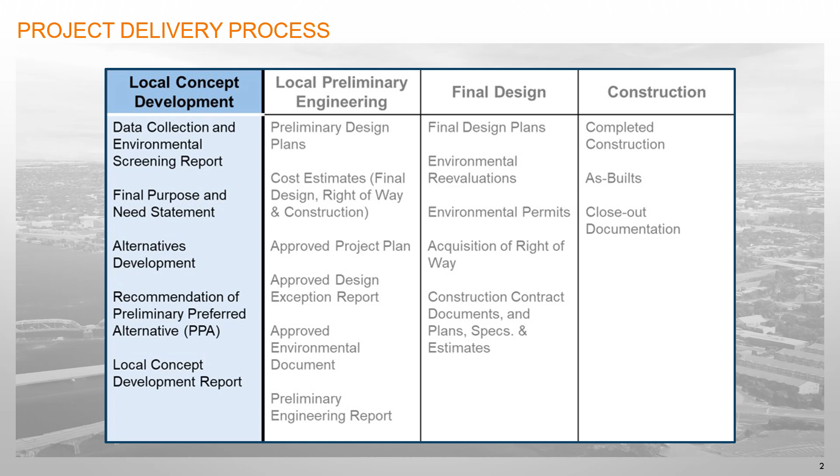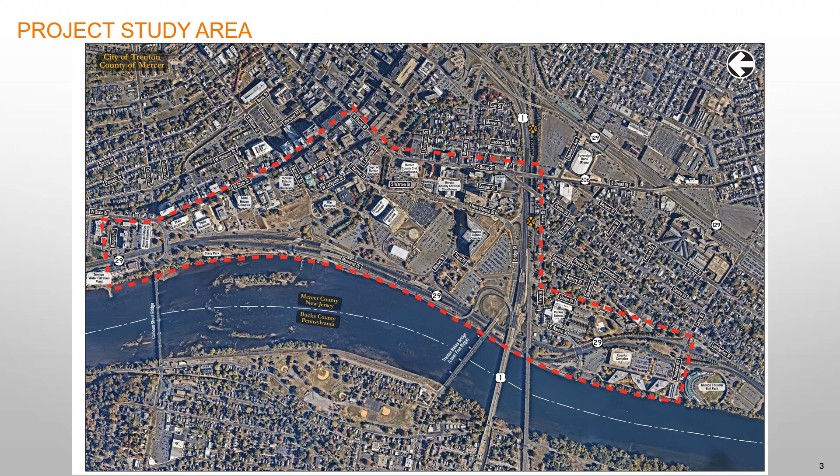The project is located in the City of Trenton, Mercer County, New Jersey, and extends along Route 29 from Cass Street to Calhoun Street and includes the downtown area bounded by Route 1 to the south, New Warren Street to the east, Calhoun Street to the north, and the Delaware River to the west. Note that the study area for the project is smaller than the area of economic revitalization impact, which we hope to be citywide. New mixed-use development and a walkable, bikeable, human-scale roadway can dramatically change the character of a city.

This project has a number of interdependent goals. First, we want to stimulate economic development in the immediate project area and citywide by changing parking lots into developable parcels and attracting developers to build multi-use facilities that include housing, retail, and business. We want to improve traffic connections to the downtown street network by converting Route 29 from a freeway to an urban boulevard and building a street grid connected to the existing street grid to the east.

We want to provide increased open space also by converting Route 29 to a smaller footprint roadway, and with the space we gain, create a riverfront park with passive and active recreation that connects the county's Old Wharf Park and South Riverwalk Park to the city's Stacy Park north of Calhoun Street. We want to increase the resiliency of the roadway so it can stay open during flood events while retaining the floodways of the Delaware River and Assunpink Creek.

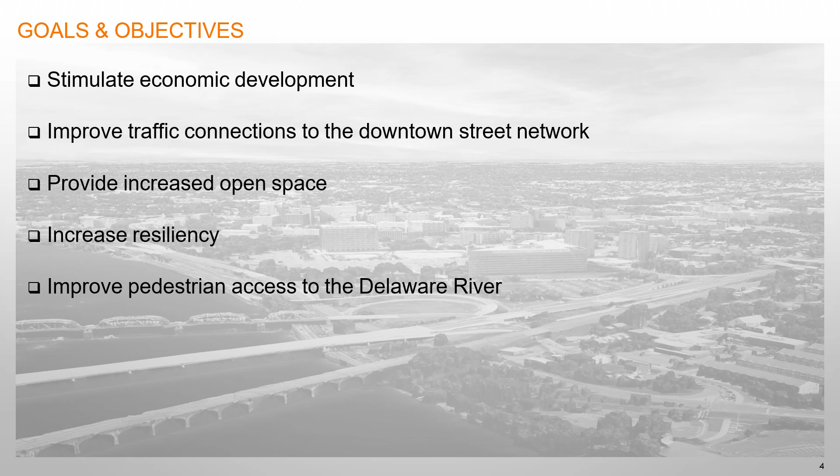Finally, we want to improve pedestrian access to the Delaware River, again by converting Route 29 from a freeway to an urban boulevard and removing the barrier created by the freeway. Route 29 has acted as a barrier to the public for access to the Delaware River. Before Route 29 was built and the state office complex was expanded, Trenton residents enjoyed a gracious waterfront park connecting the State House grounds with the Delaware River.

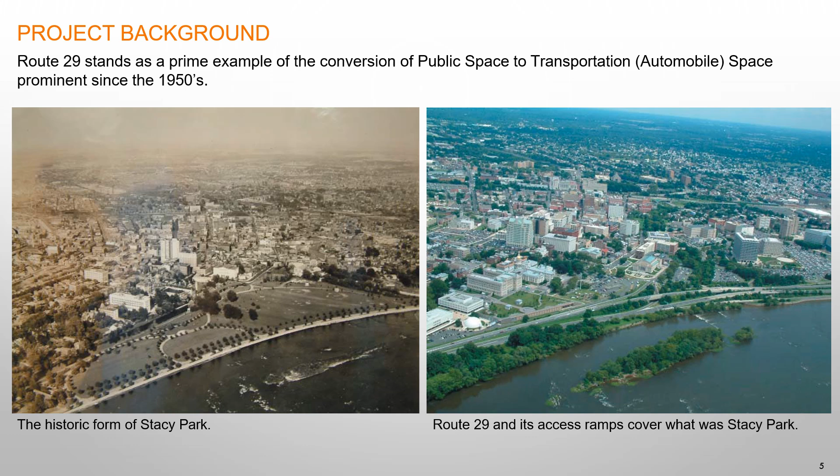In the 1950s and 60s, adapting to the age of automobiles, many cities built freeways through less developed areas, typically at the expense of parks and open spaces, which frequently existed along waterways. The construction of Route 29 in Trenton cut residents off from the waterfront. Like many other cities, Trenton has been looking to reclaim its waterfront that was disconnected from the city. This notion has been around for decades and was initiated with the formation of the Capital City Redevelopment Corporation, also known as CCRC, in 1988.

The CCRC's mission was to revitalize the downtown Trenton area that has experienced decades of decline. As part of this revitalization, the CCRC and City of Trenton adopted a redevelopment plan that called for changing the Route 29 freeway to an urban boulevard. In 2005, the New Jersey Department of Transportation embarked on a study to convert the Route 29 freeway to an urban boulevard in compliance with the CCRC vision.

All of the concepts also included converting the government parking areas into an urban street grid system that ties into the existing adjacent city blocks to the east and creates developable parcels, providing opportunities for mixed-use development, including residential, retail, and office. The New Jersey DOT studies continued with the 2009 feasibility assessment that further advanced the previous concepts to the selection of a preferred alternative. For a multitude of reasons, this initiative was paused, and now the county is picking up where the previous studies left off and is completing the concept development phase.

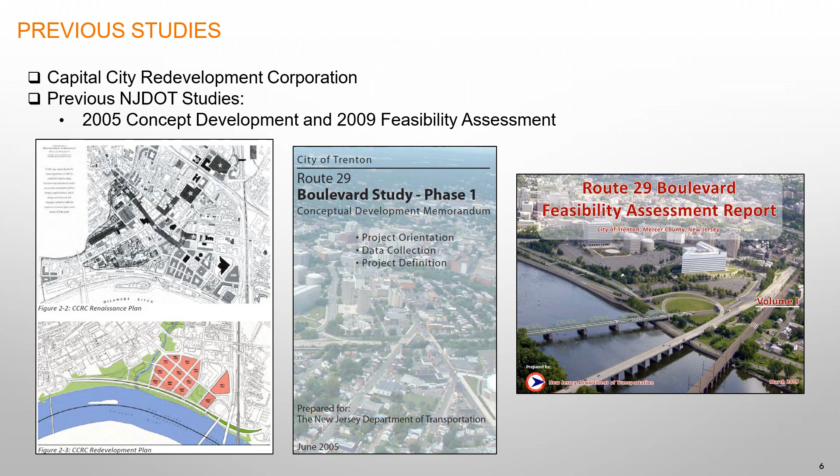Two base alternatives were developed, and each alternative changed Route 29 to an urban boulevard with features including 2 lanes in each direction, parking lanes, a center turn lane, intersections, sidewalks, and streetscape and landscaping features. The waterfront alternative essentially kept the Route 29 boulevard in its current location along the Delaware River, with a minor shift away from the river to provide room for a riverfront park where no park exists today.

The inland alternative moved the Route 29 boulevard away from the Delaware River from the Market Street exit ramp through the parking lot areas, providing more space for a larger riverfront park with a less traveled local street adjacent to the park and more choice riverfront parcels. The inland alternative was selected as the preferred alternative in the 2009 feasibility assessment study.

Each alternative creates city blocks with sidewalks, intersections, and roundabouts, and pedestrian crosswalks to provide convenient access to the river. The street grid system also allows for modified access to the Route 1 bridge, eliminating the existing ramps along the waterfront, and provides space for a linear park.

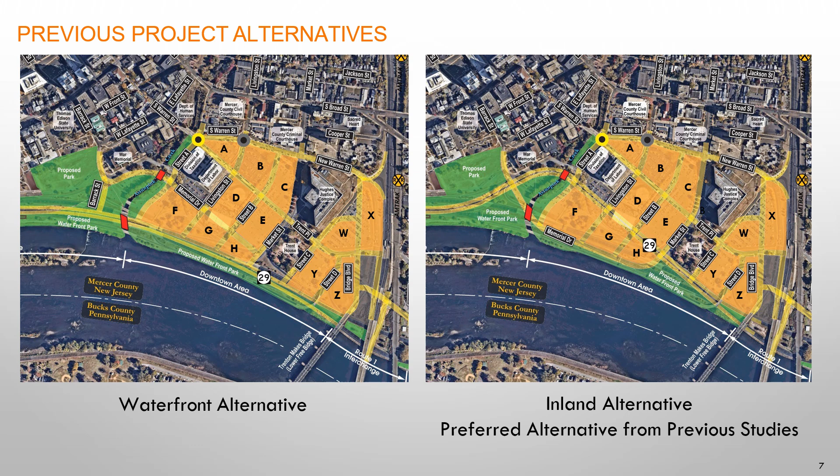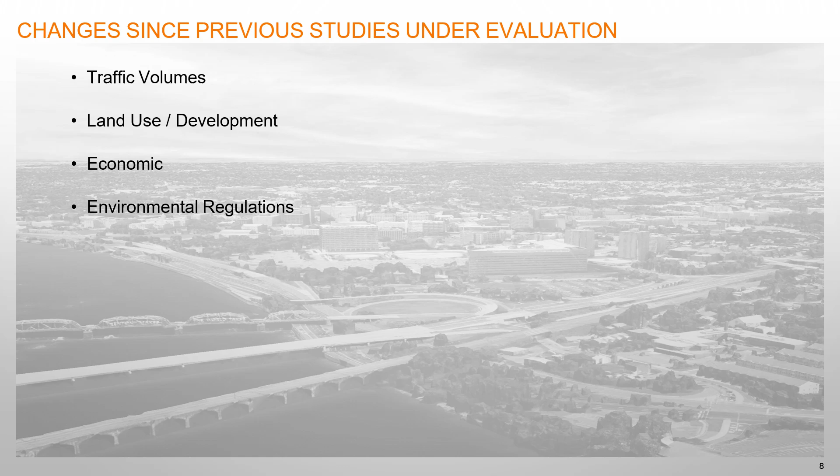It has been determined that traffic volumes have changed at different rates within different sections of the study area. Route 29 experienced the lowest decrease in volumes at about 5%, while the area around the state office buildings saw the highest average decrease in traffic volumes of about 40%. It should be noted that not all the decrease can be attributed to the COVID-19 pandemic. A review of available volume data from before the pandemic shows that volumes were decreasing on many of the local roadways even before then. In addition to changes in volume, there have been changes in demand for more multimodal infrastructure, particularly improved pedestrian and bicycle facilities. These elements will be considered as we move forward in the development of alternatives.

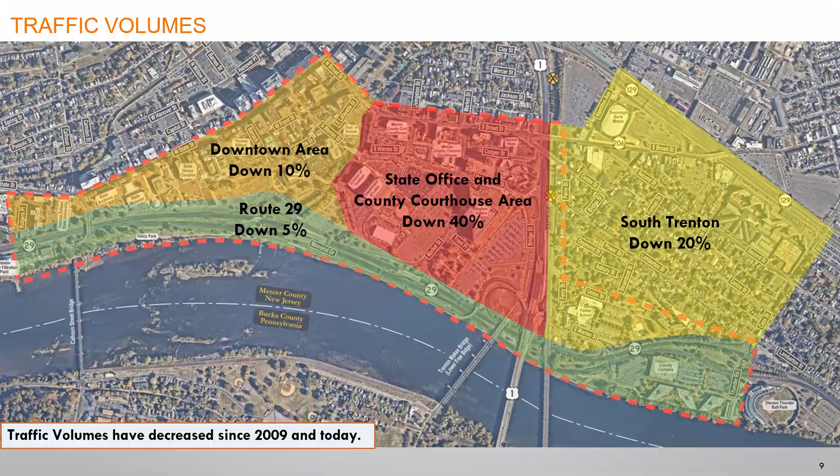Since the completion of the previous studies, there have been changes to the project area related to land use and development. Most of the downtown project area is within redevelopment zones and has seen a flurry of activity, including demolition of several state buildings, construction of the new taxation building, and Cooper Crossings residential development down by the ballpark. Active and planned projects include a soil remediation project in the parking lots, construction of the Old Wharf Park, and planned downtown redevelopments, including Kingsbury Towers. Over 630 apartment units, some with mixed use and commercial, have recently been approved, are under construction, or have been completed in the downtown Trenton area.

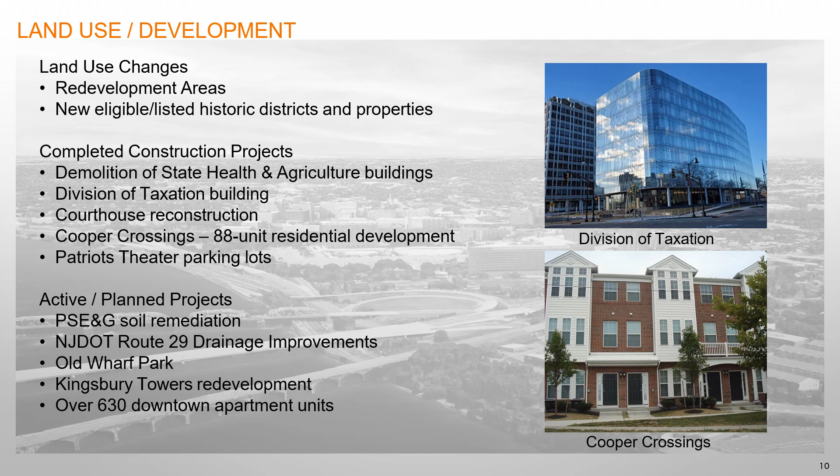Funding sources and opportunities are ever changing in the different political climates, and obtaining funding for projects is more challenging than ever due to significant competition for the funds. In addition, due to increased inflation, cost of goods and labor, construction costs have increased significantly since 2009. As mentioned previously, the pandemic has changed the way people work. The hybrid workplace has reduced office building occupancies and parking demand, freeing up space for development and economic growth.

On a brighter note, the region is witnessing economic growth from high-wage biomedical and pharmaceutical sectors. This growth is driving demand for housing, office, and retail space, opening a window for transformation not just for the broader county, but also for the city of Trenton. Near the study area, the conversion of office space to housing is helping to revive existing property values. This project provides an opportunity to further diversify the downtown region and create additional revenue for the city.

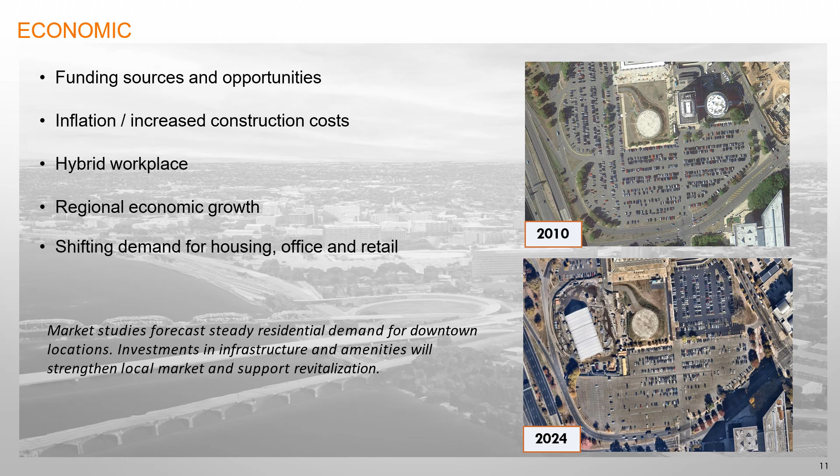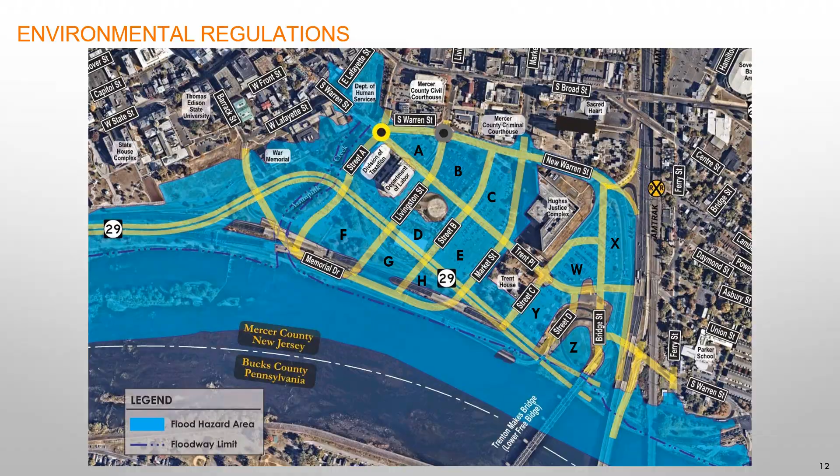Feasibility of the overall project will have to consider several critical aspects such as land ownership, permitting and environmental concerns, and cost. Demolishing a working highway and replacing it with a boulevard will be a challenge. As a result, an evaluation is ongoing to determine whether this project can be phased.

For example, the surface parking lots closest to the city core, labeled A, B, and C, could potentially be part of an initial redevelopment. The city and county would initially build the roadways and then work with developers to redevelop the surface parking lots with residential and retail, creating a more desirable area to live and work, and spur demand for the next redevelopment area closer to the river.

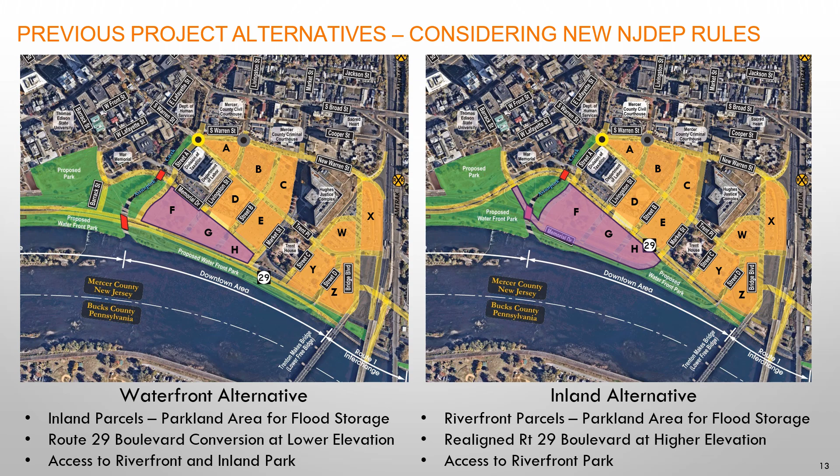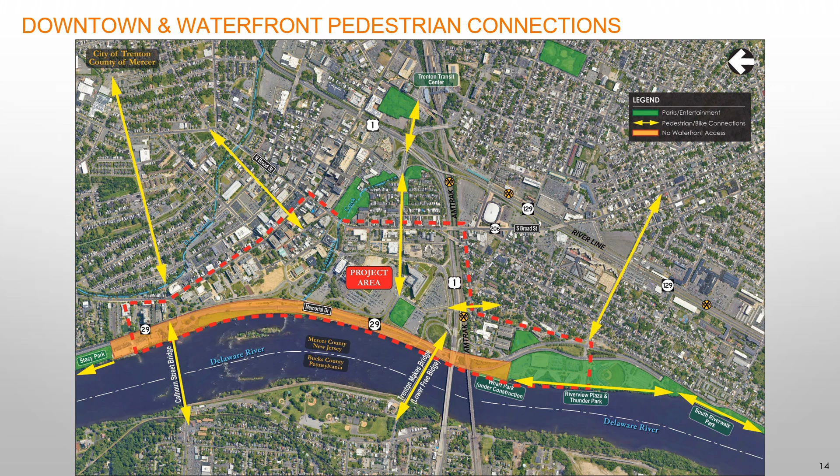In addition, the county and city currently have several active projects that are looking to add pedestrian, bicycle, and transit connections to increase safety and connectivity throughout the area. The following few slides provide examples of successful similar waterfront improvement projects that have been implemented around the country.

The first example is Riverfront Parkway in Chattanooga, Tennessee. Like Route 29, the highway was built in the 1960s along the waterfront, restricting pedestrian access to the Tennessee River. Discussions started in the 1980s about how to best utilize the space, and in the early 2000s, a plan was approved to replace the 4-lane highway with a more pedestrian-friendly and easily accessible boulevard. Construction was completed in 2004. The long process from concept to implementation proved worthwhile as the adjacent downtown area has been revitalized with growing populations, new developments, and the waterfront park.

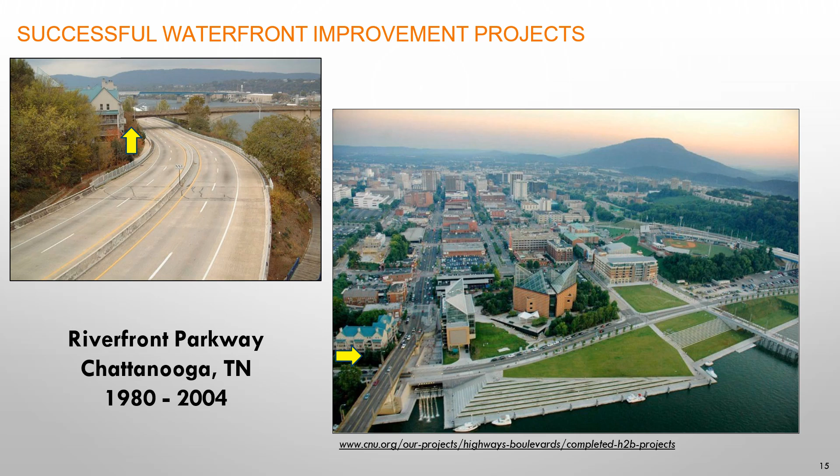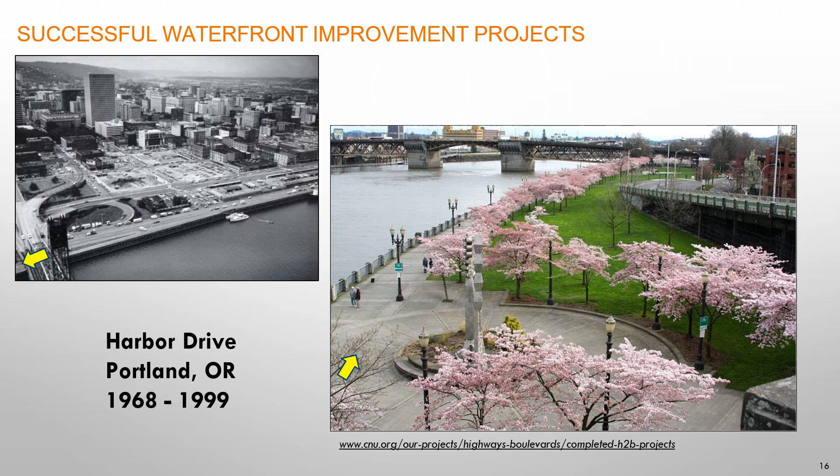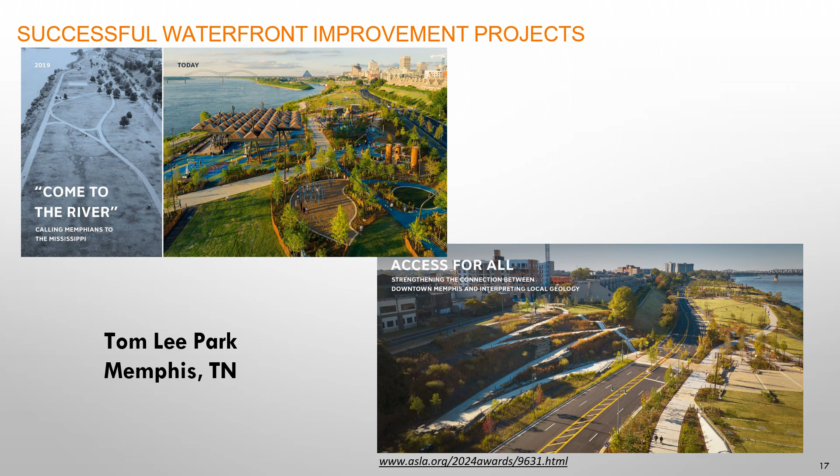A series of new ADA accessible entrance ramps connect the park to public transportation and downtown Memphis. The park features over 1,000 new trees, as well as an outdoor classroom, playground, water play features, and art installations. The park is also connected to other riverfront parks by a 5-mile walking and biking trail.

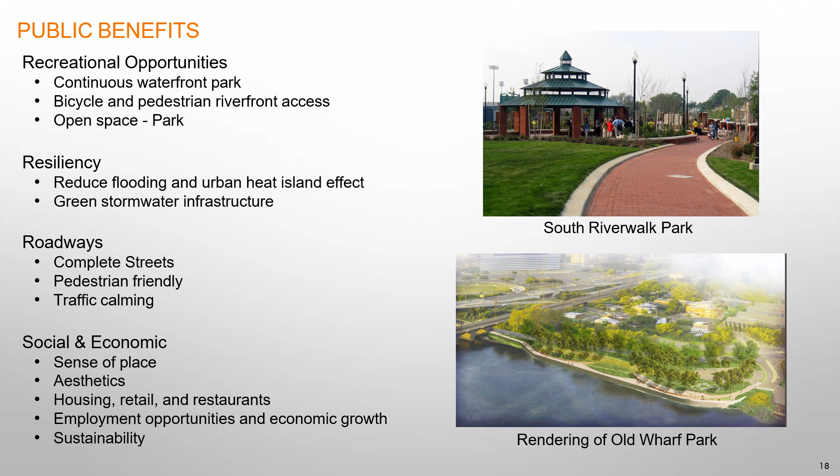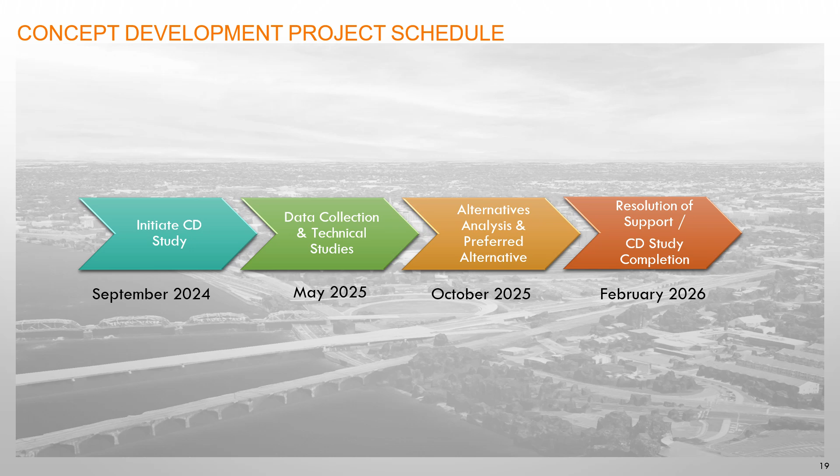The initiation of the alternatives analysis will overlap the data collection phase and will complete the impact assessment and review the alternatives with the local officials and stakeholders, with the goal of selecting a preliminary preferred alternative in October of 2025. The final documentation and resolution of support is anticipated to be completed by early 2026.